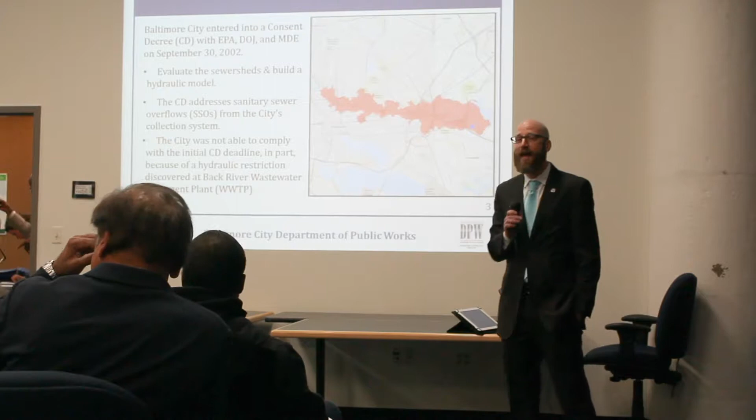As background, we first entered into a consent decree with our state and federal regulators in 2002. That consent decree required us to do a couple of things. The first was to evaluate our sewer sheds, so we had to go into our collection system. It includes about 1,400 miles of sewers in the city alone, and about 71% of those sewer lines are over the age of 50.

We had to develop a hydraulic model to really gain an appreciation of what the flows were like through our system. And then we had to set forth a series of projects that we would complete to eliminate or reduce our SSOs. The deadline for those projects was 2016.

Unfortunately, we were not able to meet that deadline, and that was in part due to a hydraulic restriction that was discovered at the Back River wastewater treatment plant. The pipe leading into Back River was actually below the wastewater treatment plant, and as a result, we had to establish a hydraulic head to push the wastewater into the plant.

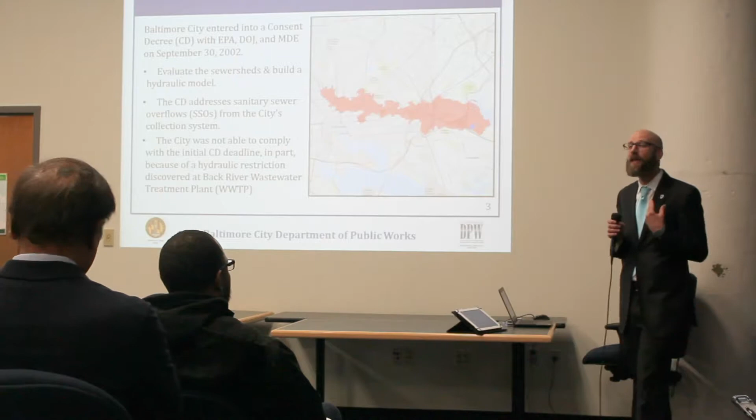That hydraulic head actually creates a 10-mile backup within the city. If you look at the chart, that pink area is actually where the sewage is residing in our system at all times. That's what's necessary to push the rest of the wastewater into the Back River plant. That obviously affects the hydrology of the system, and how our system is functioning.

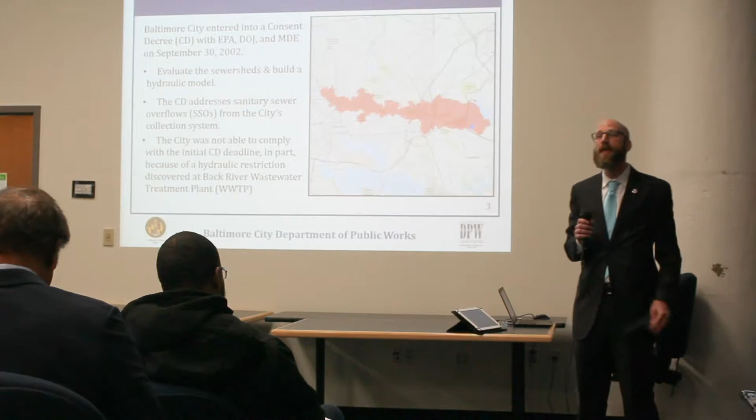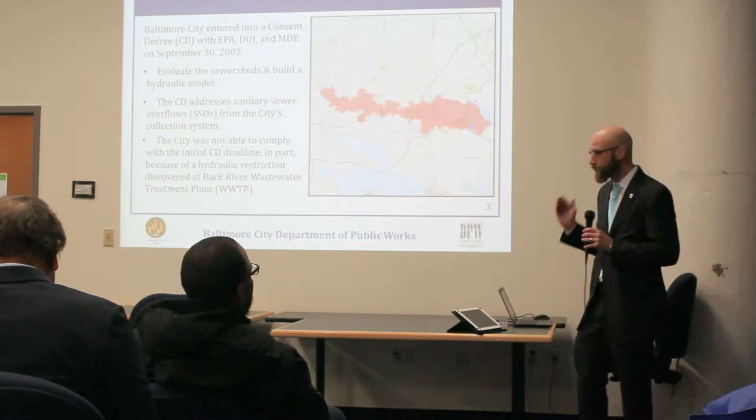It was really a significant issue to overcome, and that forced us to go back to the drawing board with our regulators and try to reevaluate what we were going to do to solve these problems, do it once, do it right. Now, when we drafted the modified consent decree, we really took a different approach.

We were looking at not just doing the list of projects. We are doing a list of projects, we added to it. It included the Headworks project at our Back River plant, which is designed to eliminate that hydraulic restriction. But we're taking on some adaptive management concepts.

So we're going to do the list of projects. We're going to then evaluate the effects of those projects on our system. And then we're going to establish another series of projects that will actually create a performance goal for our system. We want to have a 5-year level of protection throughout the city, and then a 10-year level of protection for our sensitive areas.

Our phase 1 projects, as listed up there, have a deadline of January 1st, 2021. When we complete those projects, including our Headworks project, we should be eliminating 83% of the volume of sanitary sewer overflows.

Now, when we did the modification, we also extended the time frame for compliance, and we did that for a couple of reasons. One, we're doing more work. We want to make sure that we're doing it right. We want to make sure that we're not creating a burden on the market.

We have a limited number of contractors that do this work. We didn't want to overburden that market and actually inflate the cost for ourselves. So we wanted to be able to stretch the ratepayers' money and do it in an economical fashion.

We're also looking at this as an opportunity. This is going to generate about $2.6 billion worth of work. It's not ideal, we don't want to be in this situation, but we can use it as an opportunity. We're trying to generate and develop small businesses in the city to help perform this work, help create competition, and do the work more cheaply and efficiently.

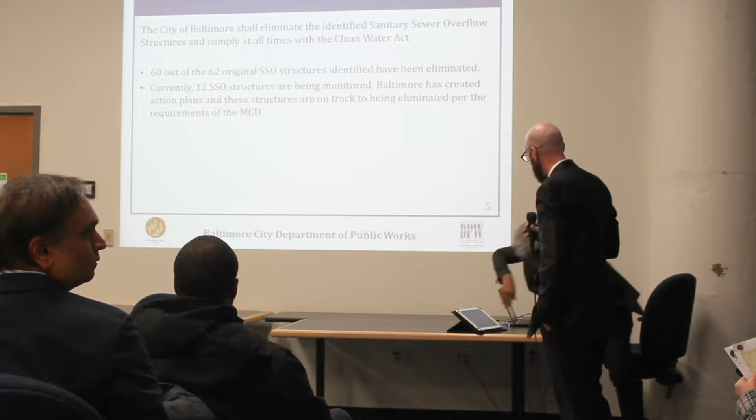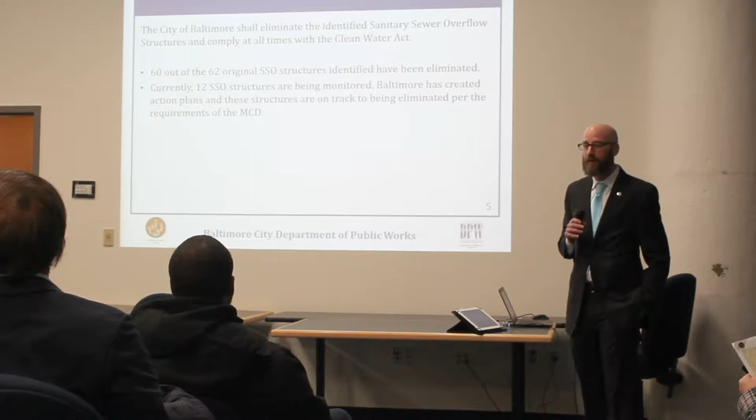So let's walk through the terms of the modified consent decree. Paragraph 8 requires us to eliminate our structured overflows. As background, when our system was designed a long time ago, prior to the Clean Water Act, there were actually pressure releases designed within the system.

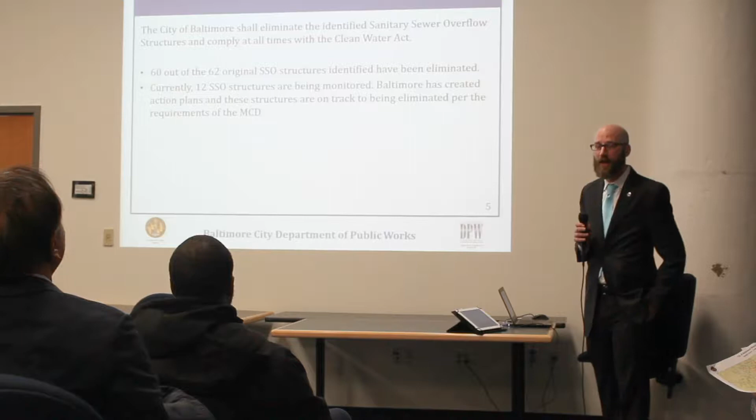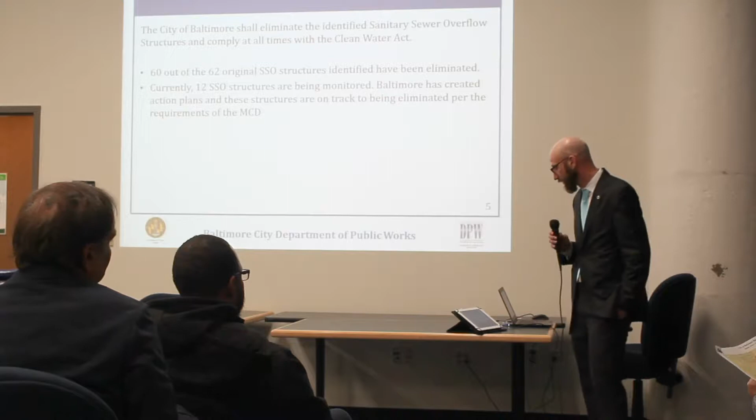There were a number of structured overflows. When the capacity for our collection system was maximized, they would actually serve as a pressure release to allow sewage to be discharged to a local receiving water. Obviously, that is not how we would design a system today. It is not ideal, it violates the Clean Water Act. So we have to eliminate those.

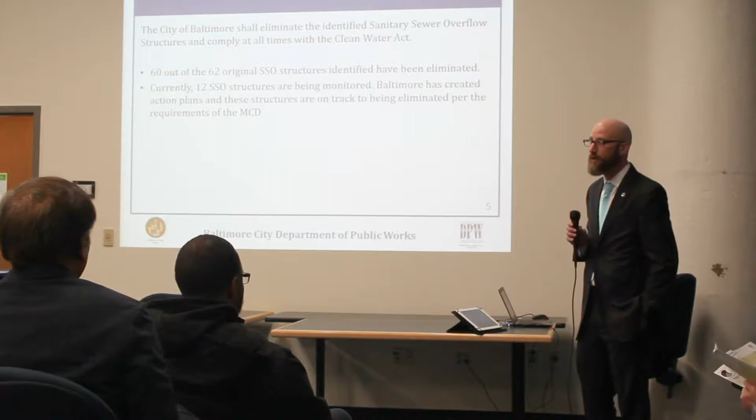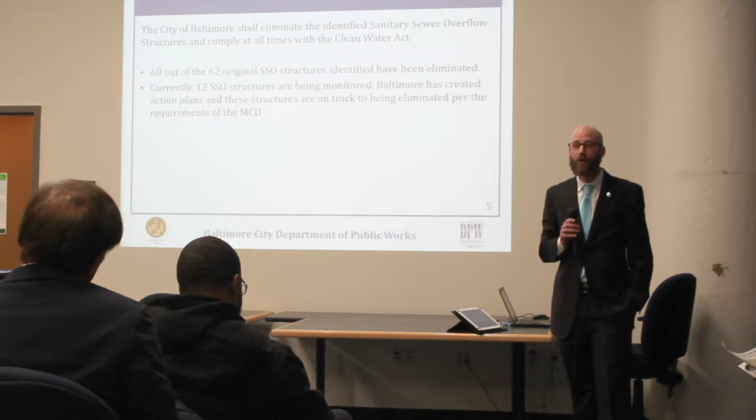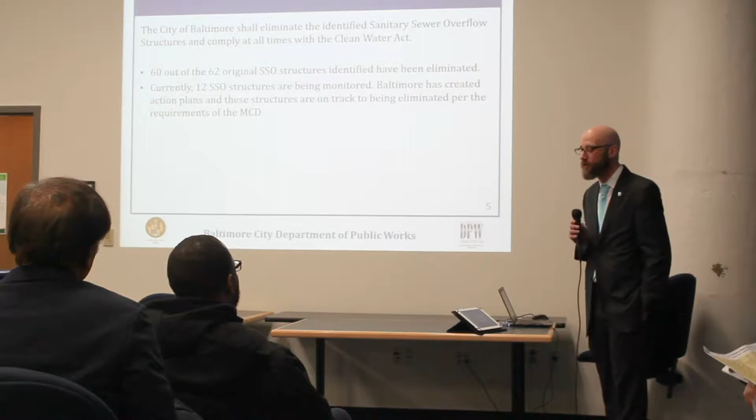Of the original 62 sanitary sewer overflow structures present in 2002, we have eliminated 60 of them. The two that remain are structured overflow 67 and 72, which discharge to the Jones Falls. During the course of our work, we identified another 13 structured overflows, and we've been able to eliminate 3 of those. So currently we have 12 structured overflows that we are monitoring. We have flow monitors on each of those so we can properly capture the flows during rain events.

So over the past 12 months in 2018, we have a map here showing the work we've been doing. The green areas, let's call them lime or chartreuse, are the areas where we completed work.

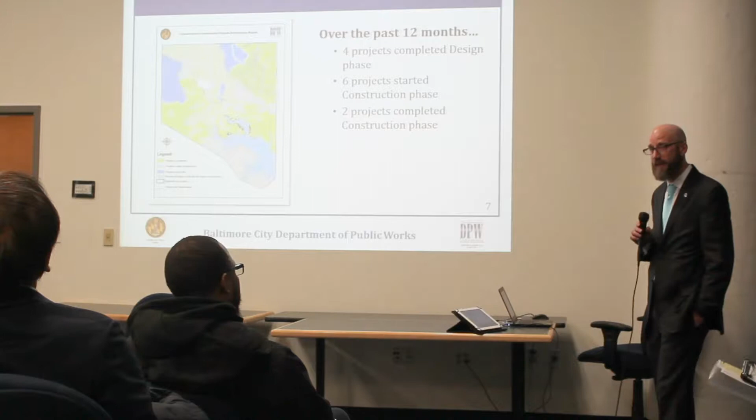This year we finished 2 more projects totaling about $30 million. We actually had 3 projects scheduled to be completed by January 1st of 2019, but we finished one of those projects at the end of 2017, well ahead of schedule.

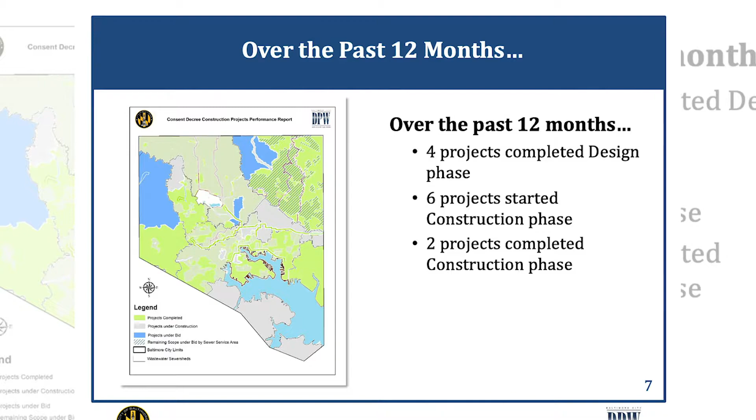The gray areas are the areas within the city where we have ongoing projects. We have 6 ongoing projects totaling about $93 million. The blue areas have projects that are out for bid, so construction should start soon.

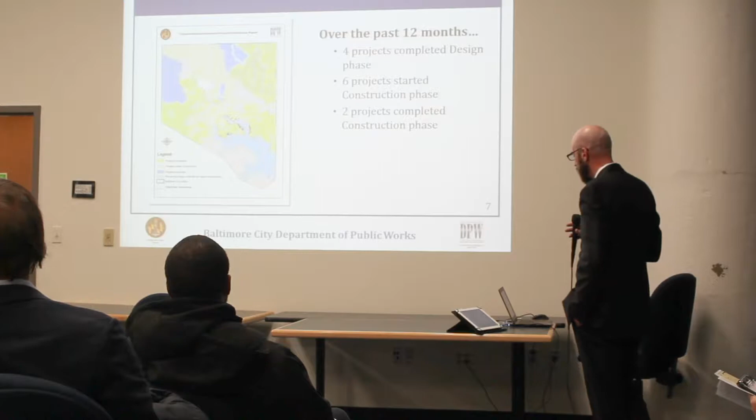Then we have the areas which are hashed, and it might look a little dark green, but we have completed projects in these areas while having additional areas out for bid. We have 4 additional projects, and they should be going out for bid shortly.

So in addition to the construction projects we're doing, we have deliverables, reports that we submit to our regulators, and a number of things we're reporting on. We have complied with all of our deadlines so far, and we're always looking for more data to help us with our projects.

So we have installed 20 additional rainfall and flow monitoring points. We have our early notification sites that we've installed, and we're trying to use this additional information to better inform the projects that we're doing.

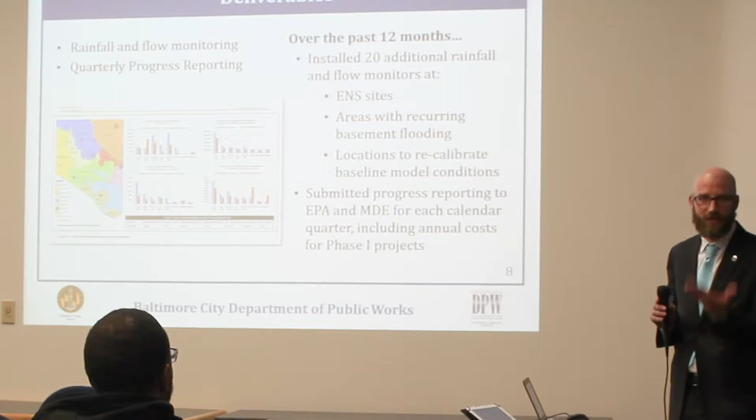That will help us evaluate the effectiveness of our phase 1 projects. It will help us evaluate whether we're going to be meeting our 5- and 10-year level of protection for our phase 2 projects. They also help us resolve problem areas as we're working through them in the city.

We have submitted our quarterly reports to the state and federal regulators. They are posted on our website. If you are not already signed up, you should go to the website. If you go to the consent decree page, you can sign up to receive updates. I would encourage you all to do that. The chart on the left is an example of the informational graphics we have in our quarterly reports.

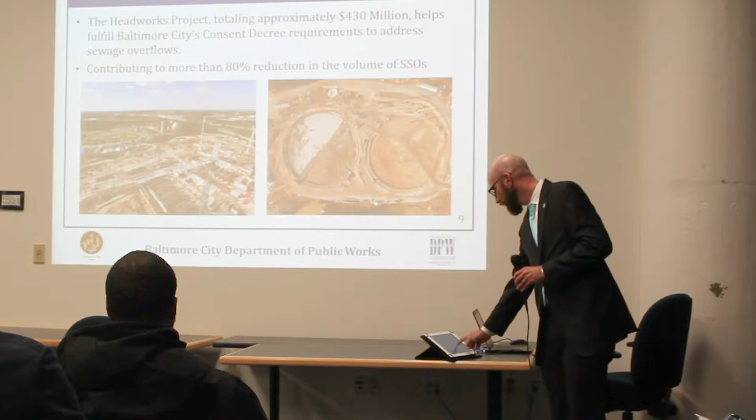So as noted several times, we have the Headworks project. It is a pretty massive project which will eliminate the hydraulic restriction within the city. It is an expensive fix—it'll total about $430 million.

But once we complete all of these phase 1 projects, we will eliminate 83% of the SSO volume experienced by the city, and Headworks will really be responsible for the lion's share of those reductions. The project is currently 35% complete based on time, and it's on schedule to be completed by January 1st of 2021.

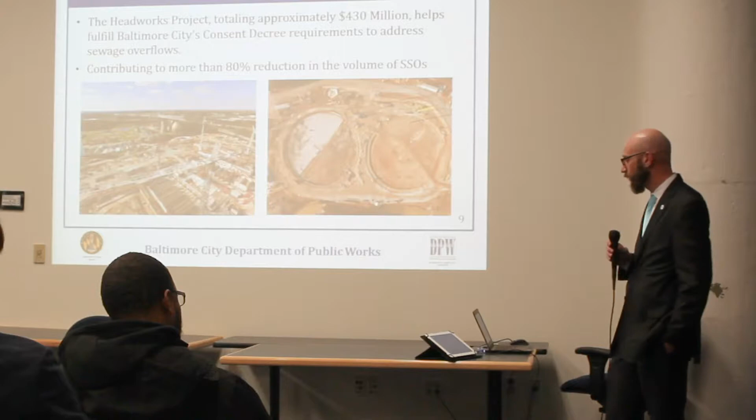So we are required to eliminate illegal connections when we find them. The illegal connections are basically roof leaders or sump pumps, which are channeling stormwater, clear water into our sanitary sewer system. That is an issue because it takes up capacity, and we will eliminate those when we find them.

The good news is most of those finds occurred during the early stages of the 2002 consent decree. We have not found any illegal connections this year, so there were no enforcement actions that were necessary. We had no overflows or incidences that would cause overflows.

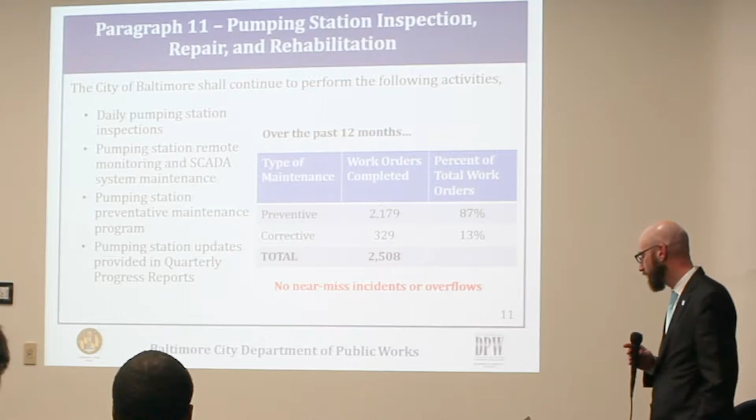We've also upgraded our SCADA system. SCADA refers to supervisory control and data acquisition software that we utilize at our plants, and that simply helps them run in a more efficient manner.

So one of the more impressive things we did under the consent decree is establish a hydraulic model for the city. The city developed the model as part of the 2002 consent decree, and it included all of the pipes that were 10 inches or larger, and then 8-inch pipes connected to those pipes. It also includes the city's 9 pumping stations.

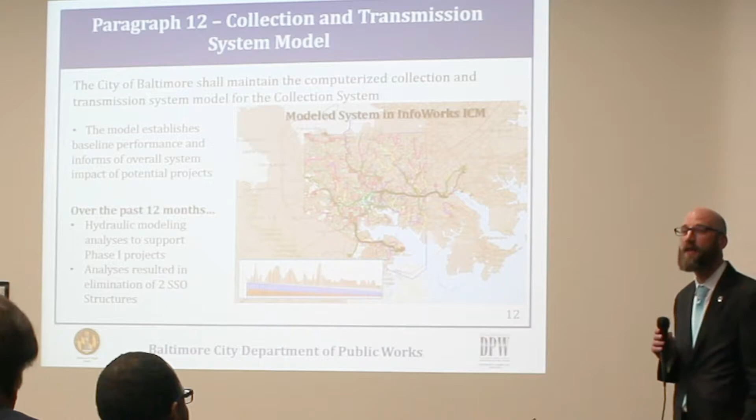So what we're using the model for is to evaluate the effects of our phase 1 projects. That includes the impacts of rain events on our projects and on the collection system, and we'll also use it as a means of helping establish the phase 2 projects that we'll need to hit that performance requirement. In 2018, we're mainly using the hydraulic model to support our phase 1 projects and as a means to help analyze and develop SSO structure elimination plans.

So DPW established the Office of Asset Management so we can work on proactive maintenance for our utilities. Our asset management staff has prepared our O&M plan. That was approved by our regulators a few months ago. We also submitted our annual progress report on our O&M plan. If you didn't know that, you can go onto our website and subscribe for updates. If you log into the DPW site and hit on the Sanitary Consent Decree program, a box will pop up and you can fill that out and get updates.

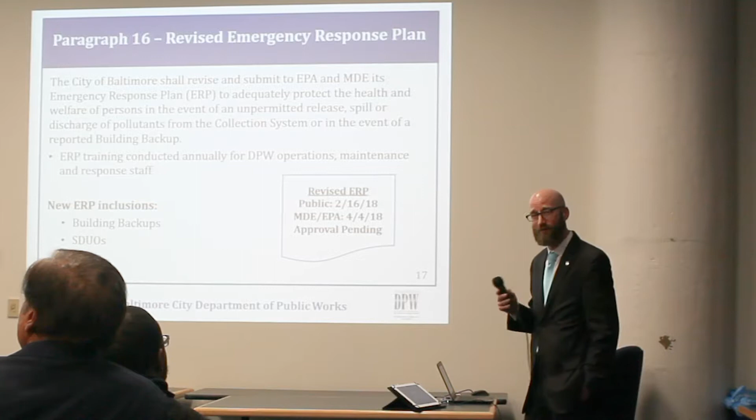So for record keeping, for our emergency response plan, we have submitted a revised emergency response plan. I suspect that will be approved shortly. It was submitted on time in April, but the regulators have not gotten back to us. We do have a government shutdown, so there have been some unexpected delays.

But that being said, we're seeing those reductions. Some of those are caused by wet weather events, but we also have dry weather overflows, and we can use all of your help. We need to educate the public on the proper means of disposing of fats, oils, and grease, and how to properly dispose of flushable wipes, which are not flushable - those need to be discarded into the trash. So there are things residents can do to help us stop and abate the dry weather SSOs we've experienced. We have materials on our consent decree webpage, so we encourage you to visit the Department of Public Works website and gain a little more information.

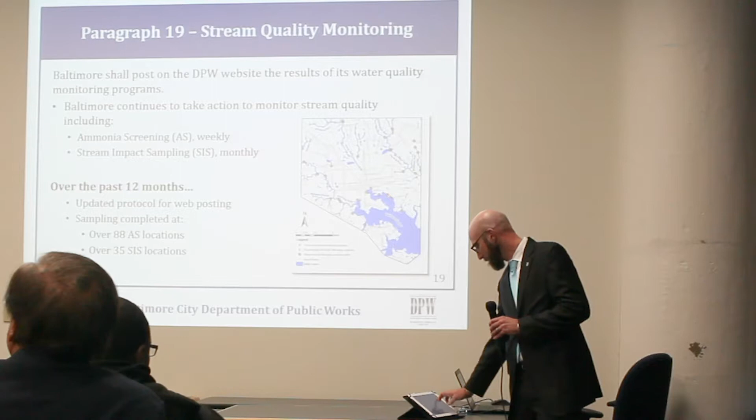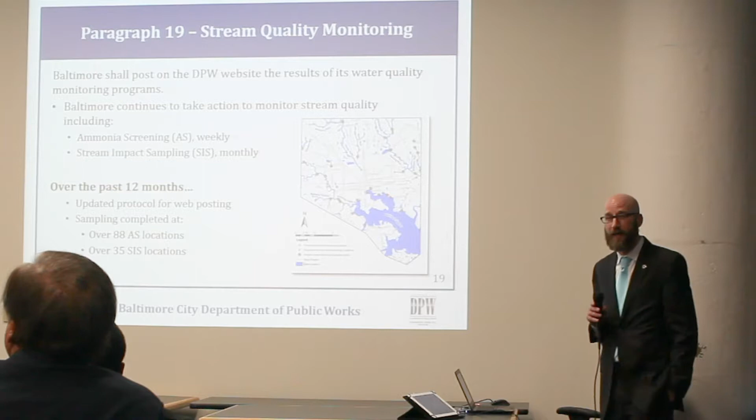So for water quality monitoring, the Office of Compliance and Laboratories goes out and does two things. We do ammonia screening on a weekly basis, which is going into the field and testing for higher levels of ammonia, which may be indicative of sanitary discharges or other issues. We are also doing stream impact sampling, done monthly. The information provides a general account of water quality - it's not directly related to our sanitary sewer overflows. This is actually data we're required to gather under the municipal separate storm sewer permit. It's not specifically designed for our sanitary sewer system.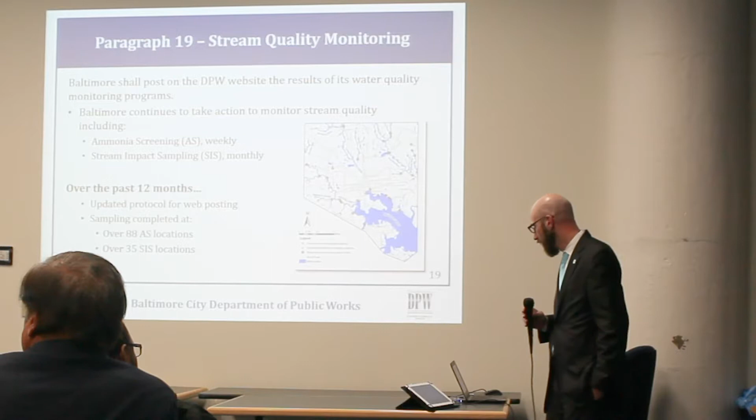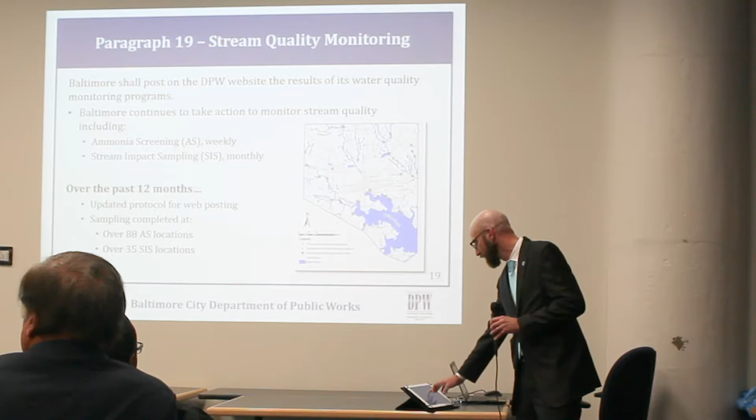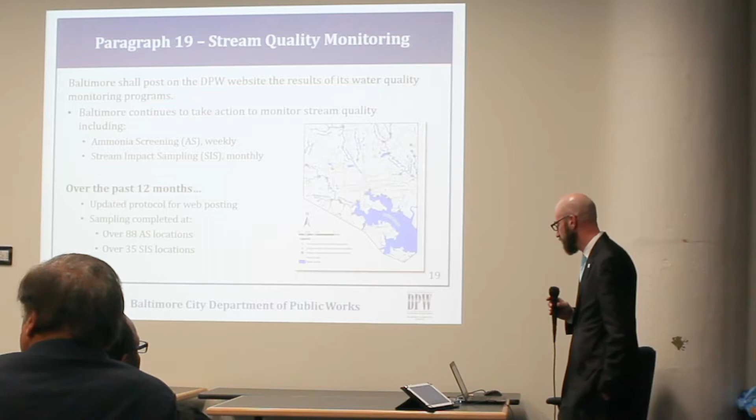There's not a direct correlation between water quality and our sanitary sewer overflows. There are a lot of things going on that we can't control for: development activities, human behavior, historic pollution in areas, and weather obviously has an effect. So whereas we are seeing improvement in water quality, it doesn't necessarily have a direct one-to-one correlation with the reduction of SSOs, or 30% reduction. We also have Baltimore County doing similar work—they have a similar consent decree, so they're also working to abate their discharges. But again, we are seeing improved water quality throughout the city.

We have 4 major watersheds in Baltimore: the Jones Falls, the Gwynns Falls, the Back River, and the North Branch Patapsco. Each of these is listed as impaired for bacteria, and the TMDLs, the total maximum daily loads established by MDE, are based on E. coli. The good news is that we're seeing a general decline in bacteria levels, but again, it's not a direct correlation with our SSO reductions.

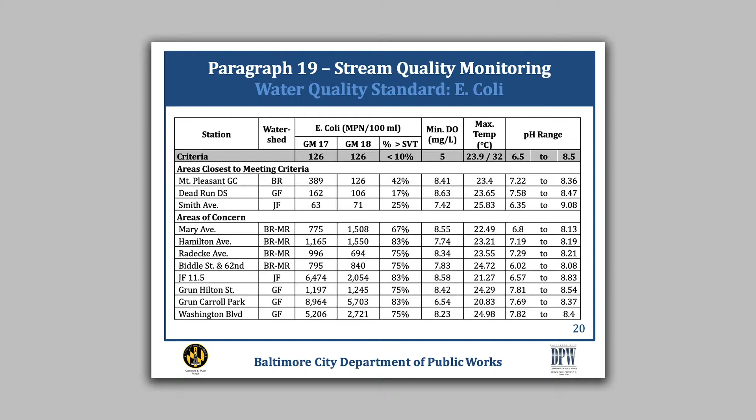If you look at this chart, we have different stations—not all of our stations, just some of the areas where we are coming very close to meeting our water quality criteria, and areas of concern that we continue to have in the city. For E. coli, we're looking at the geometric mean from 2017, the sampling from 2018, and in the next chart, the percent of variation based upon the individual samples taken. We're trying to have that be close to 10%, or under 10%.

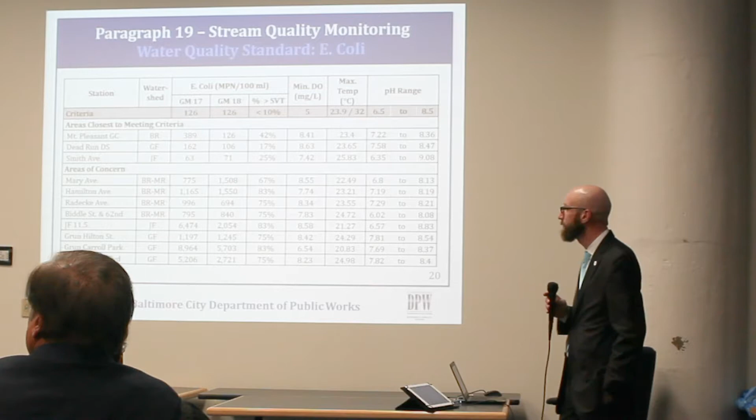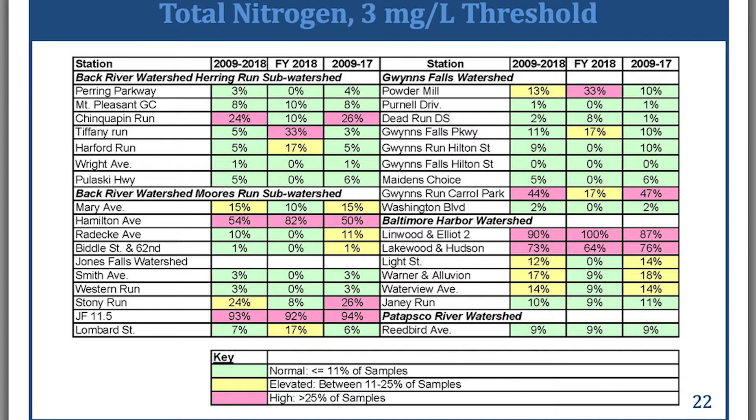Finally, we continue to do work on total nitrogen sampling throughout the city. Here we have the percentage of samples at different locations that are over the 3 milligram per liter threshold. If you look at the green areas, those are actually good—we're within the sampling requirements. The pink areas are still of concern, and the yellow are transitional, where we're getting close. Overall, we're seeing improvements in our nitrogen samples, though we still have areas of concern.

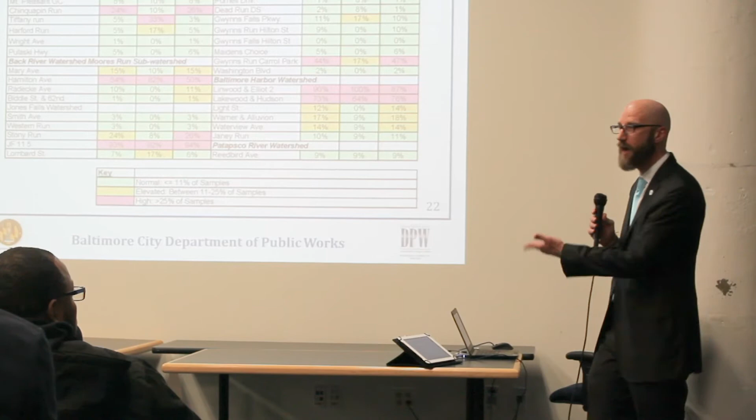For example, JF 11.5 right here—that is actually one of our structured overflows, so we're taking those samples at the overflow structure itself, not from the stream, the Jones Falls, but from the structure. So we would expect those to be high.

So for our deliverables, we are reporting on all of these and providing them to you, the public, on our website.

Now, I talked about some of the new ways we're using technology, and I think this is one of the more exciting things we're doing. We've actually developed an interactive map for our SSOs, showing in real-time the SSOs that are occurring throughout the city.

I can do a quick demonstration for you. So here is the map currently—these are literally the SSOs occurring in the city. If a new SSO is identified, that would show up as a large red dot, referred to as new.

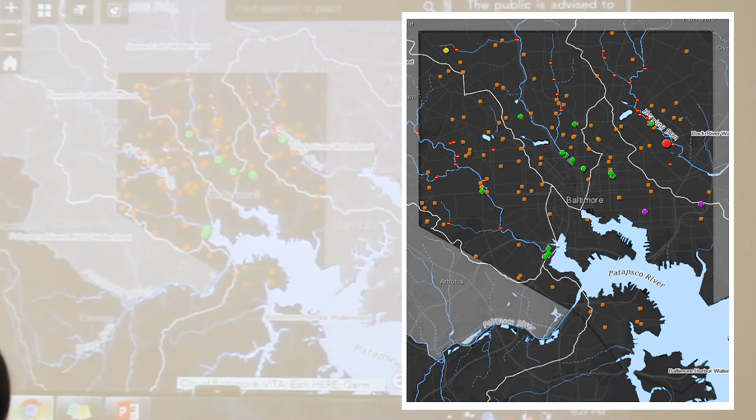It might not have all of the information yet—we might still be gathering that information. But by the time we report to MDE a 24-hour report, that will automatically be transformed into a purple dot, with information on where it occurred, what water body it's discharging to, and what the estimated flows are. All of that information will be available to you as we go through, and we're required to report within 5 days when the SSO is abated.

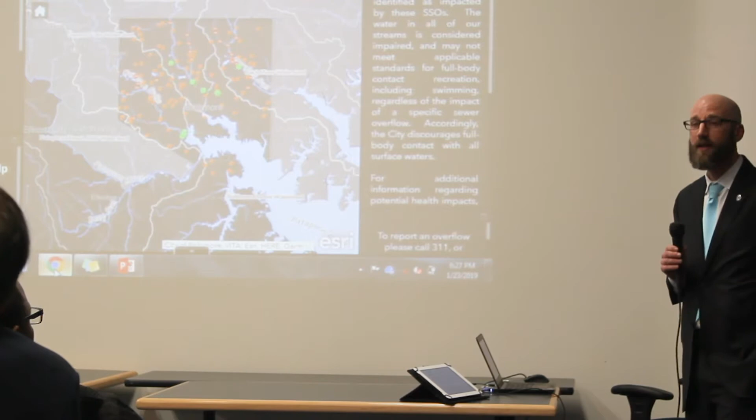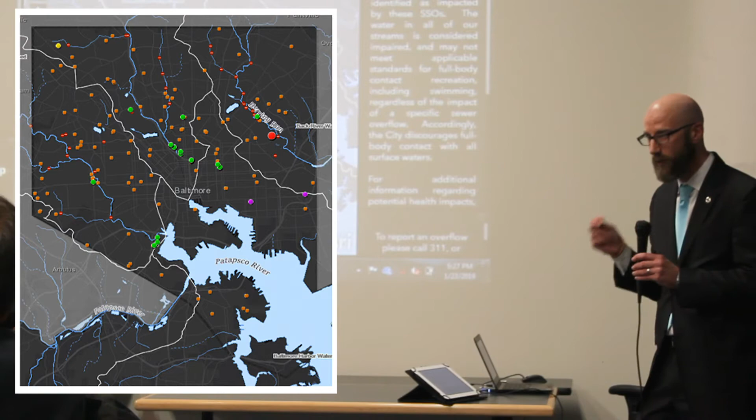Those will be transformed into either an orange, blue, or green dot, depending on the volume. If it's under 10,000 gallons, it will be a smaller orange dot. If it's over 10,000 gallons—those are the ones we really want you to focus on—it will be a larger green dot. If we go up to any one of these, we can click on it.

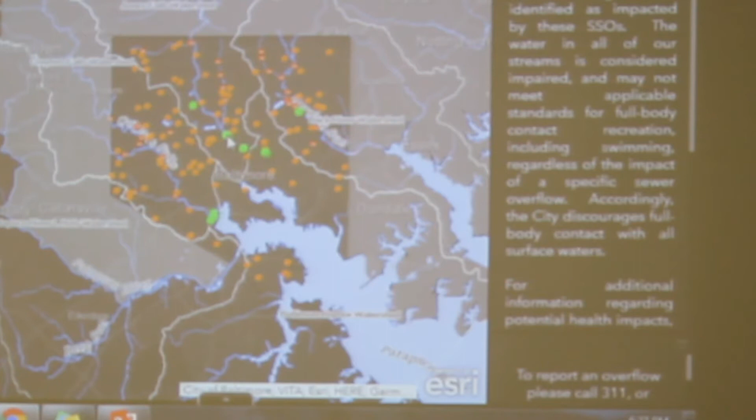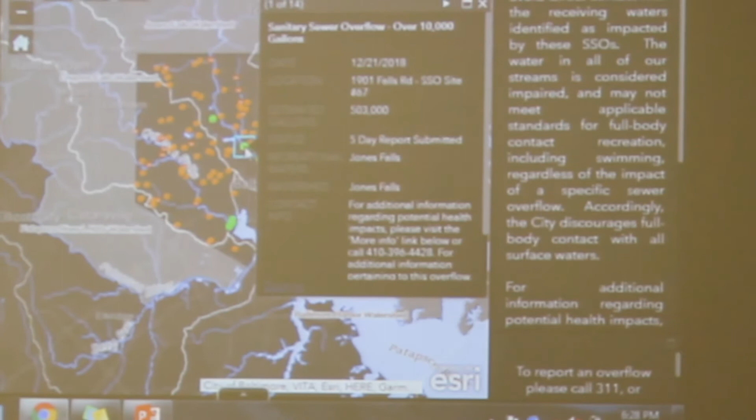This is the location of structured overflow 467. And here you go—at the top you can see '1 of 14,' so there have been 14 discharges from SSO structure 467, and you can actually scroll through them all.

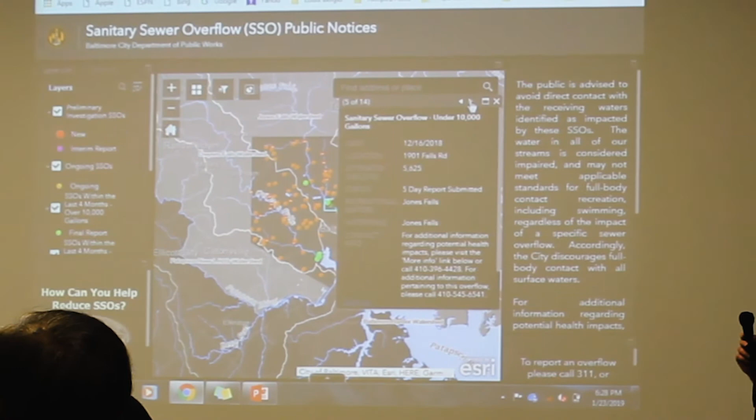If I can work a mouse, you can see what we've been experiencing in the city. We're showing where we're discharging to. It shows a 5-day report submitted, the estimated gallons, and the watershed. If you want to look at another one, here we have a 5,625-gallon discharge. So we're capturing literally everything.

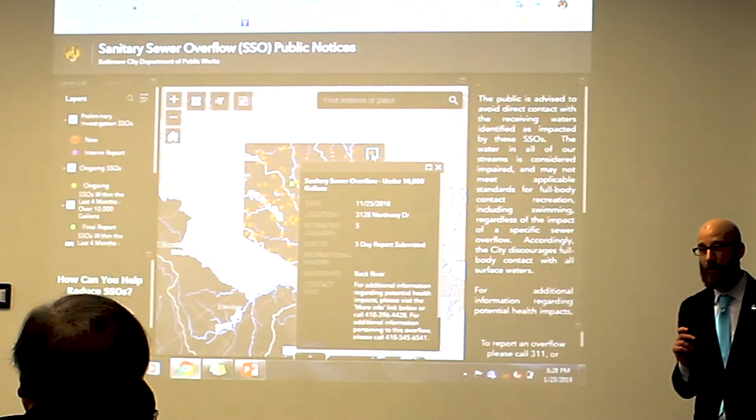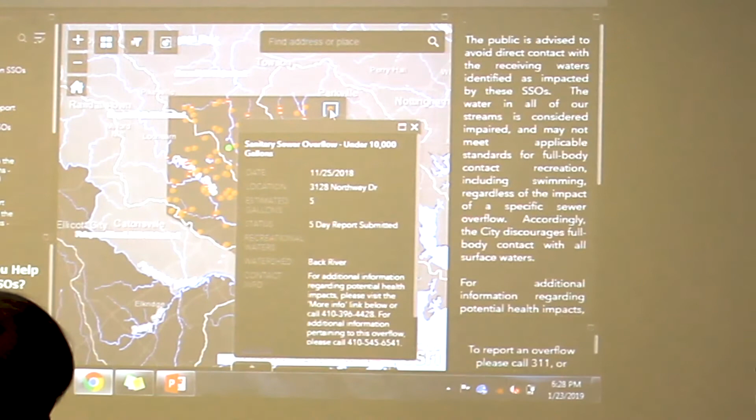This didn't actually make it to a recreational water, so we actually don't have to report on this to the public. But we'd rather over-report and capture everything and be more transparent. Between the two, missing something and over-reporting, we're going to go with over-reporting.

Easier. These will stay up for 4 months, and the reason we chose 4 months is because after that period, we've reported that in a quarterly report. If you look at the very bottom and want to gain access to our quarterly reports, it can be accessed through that link. You have access to all the information regarding the historical discharges.

And we've tried to add in additional filters for you. So if you're looking at a specific date, you might need to trust me on this one. You will be able to filter by date or by watershed. It's having trouble loading. I apologize, the Wi-Fi is not great in here.

We're also giving you information regarding rain totals. We have data from one of our rain gauges, and that will allow you to see if on a particular date we had a lot of SSOs, you can cross-reference it with the amount of rainfall we've received.

Finally, if you wanted more information on how you all can help reduce dry weather overflows, how you can properly dispose of your fats, oils, and grease, how you can properly dispose of your flushable wipes, that can be accessed at the bottom. Information on how to get information from the health department can be accessed on the right-hand side, as well as the phone number for our communications office if you have questions regarding a specific overflow.

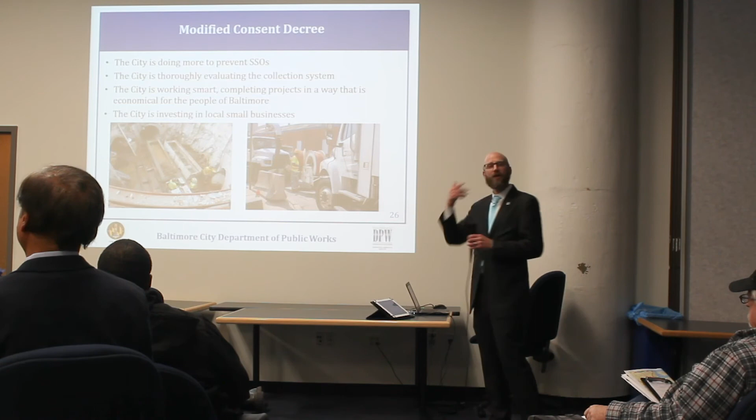So in summary, under the modified consent decree, we're going to be doing more work. I think we're doing it in a more focused manner, using adaptive management principles. We're creating a performance goal for our system, so we have a level of protection we're going to be meeting, with a 5-year level of protection citywide, 10-year for our sensitive areas. We're going to be developing phase 2 projects to make sure we get there.

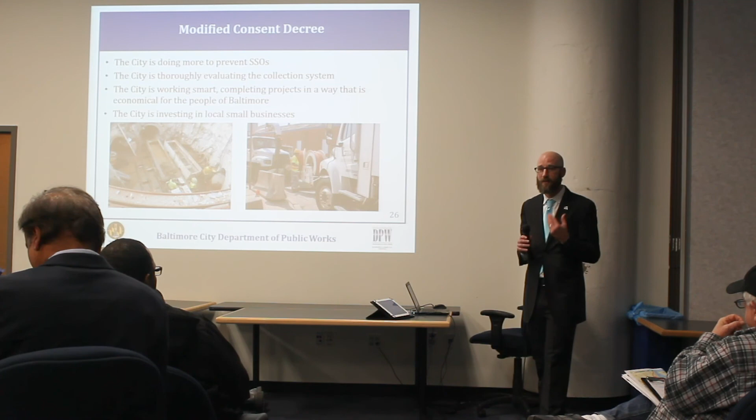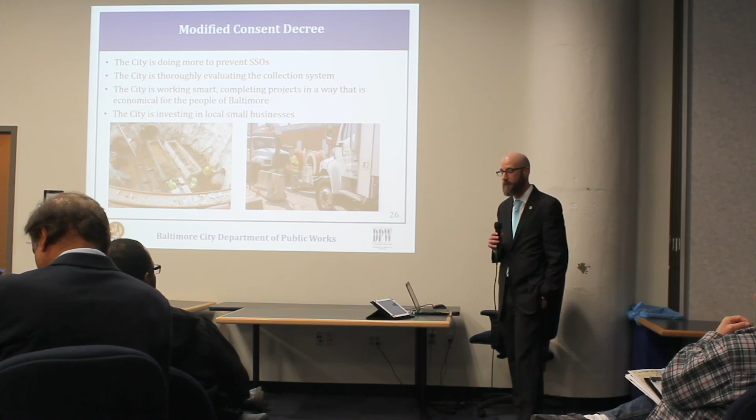Because of the additional work, we are taking additional time. We want to make sure this is economical for our residents, our ratepayers. And finally, we're using the consent decree as a means and an opportunity to grow businesses in Baltimore.